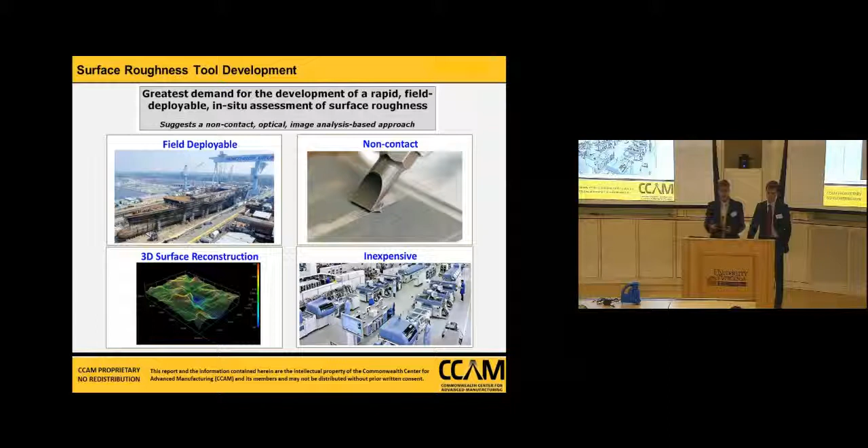It should be non-contact so that it doesn't affect the surface that it's inspecting. In addition, it should be inexpensive so that it can be proliferated and put throughout the entire environment. And it should also be able to reconstruct an entire 3D surface so that a height map can be used to calculate all the desired surface roughness values.

When our group went out, we kind of found that there existed two categories of existing profilometry tools, one of which were mechanical profilometers, which are relatively inexpensive and operate by dragging a stylus along a sample surface and measuring physical displacement. Although they're relatively inexpensive, they do have sample contact, which is an unfortunate consequence. There also exist non-contact setups that are mostly very expensive and laboratory-based, and are prohibitively expensive to be able to bring out into the field.

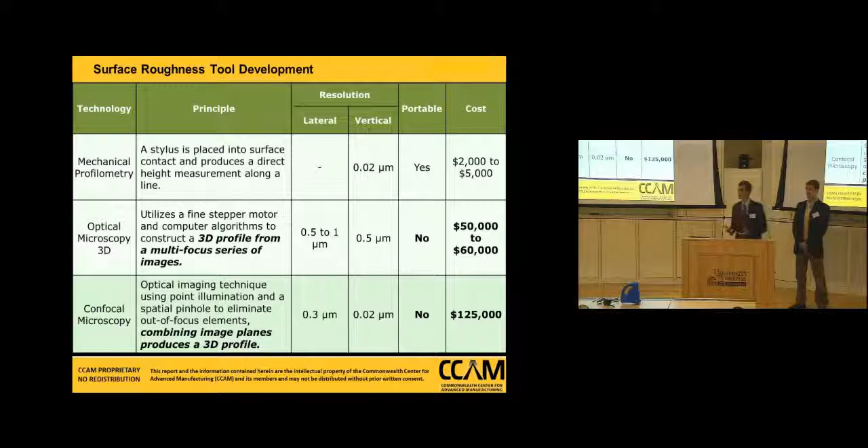Right, so as Robert touched on, ideally we would have a combination of these two tools. You would have the 3D image reconstruction capabilities of the confocal microscope or the optical microscope, but with the lower price tag of the mechanical profilometer. And what we found in looking in industry is that such a tool didn't really exist. So we set our own task of actually developing this tool.

And the result of this work was the first generation portable optical profilometer. It's small enough to be handheld. It's the blue trinket up in the front. It has a fairly low image acquisition time, 10 to 15 seconds, and it has the capability of calculating roughness statistics on the 1.6 to 12 micron range. Also critically, you can see that the cost is very low. It's below $7,000, which is much, much less than competitive 3D profilometers.

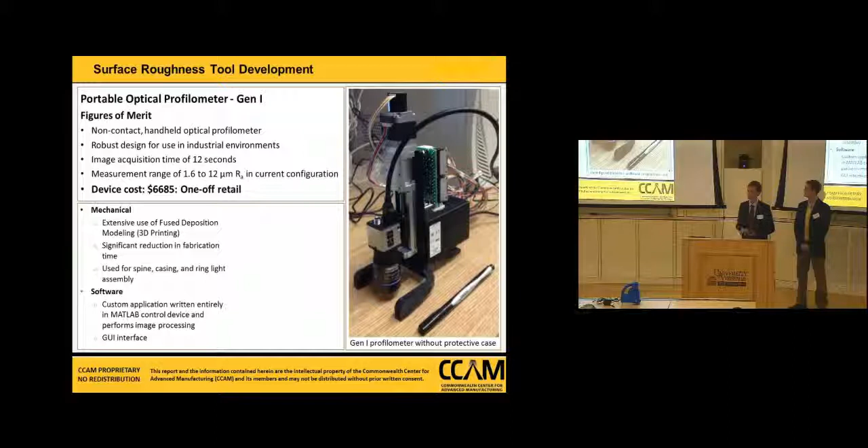So what you can see here is the principle upon which this device operates. So what you do is you have an imaging assembly that takes a series of images of the same area, but at different heights, so in the Z dimension. So you can see the images across the top are of the same area, but different portions of those images are in focus corresponding to different heights in that map.

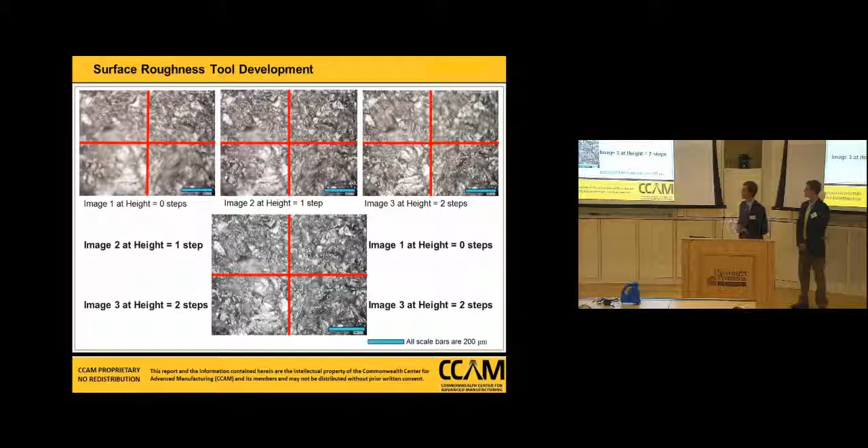And based on the knowledge of an X coordinate, a Y coordinate, and a Z coordinate, based on what image in the stack a particular portion of the image is in focus, you can stitch together a composite image that's completely in focus because it takes different portions of the composite images. Also with this information, you can create a 3D reconstruction of the surface from which you can deduce roughness statistics.

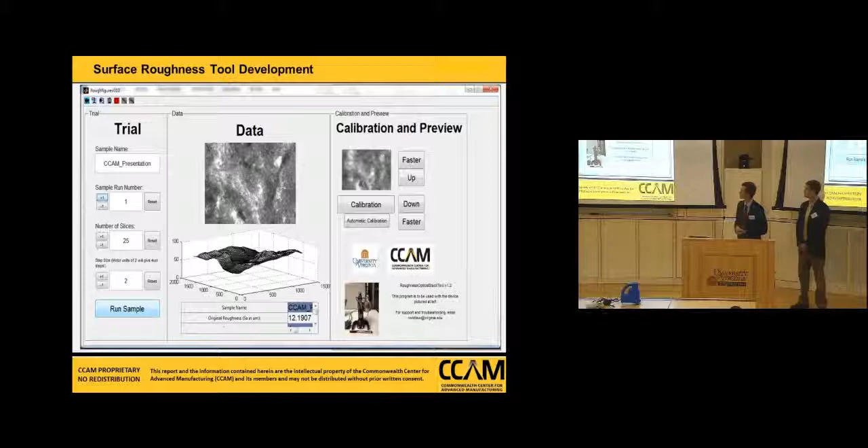So here we have the user interface. It's very intuitive, and you can easily track different samples or batches throughout a manufacturing process. Also, you can see the reconstructed image and height map in the middle there. So we were happy with the results of the first generation, but we pressed ahead and made a third generation.

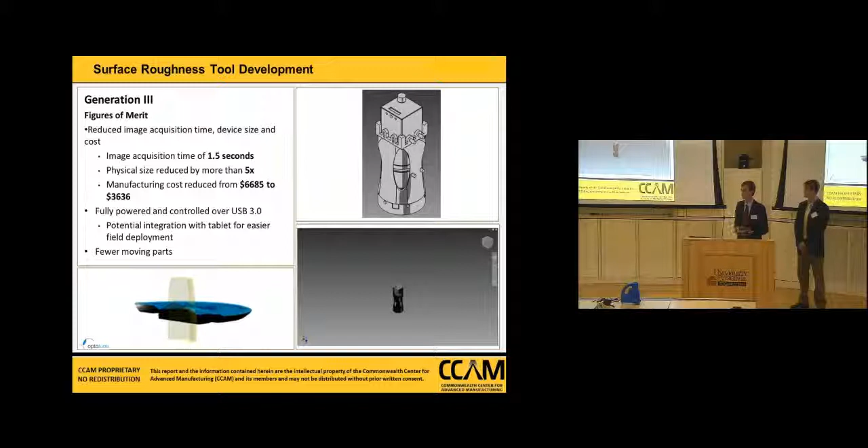So instead of using a traditional mechanical linear actuator to step through those varying planes of focus, we're using a liquid lens, which you can see an animation of in the bottom left corner there. And what that does is with a piezoelectric actuator, you can deform a membrane, which changes the optical characteristics so that you can get, again, a stack of images, but in a much smaller and faster package. It's about 10 times faster and actually $3,000 less expensive because the control hardware is not quite as expensive.

So in conclusion, the tools which we've developed are good alternatives to products which are currently available for purchase. They've been extensively benchmarked against NIST standards, and because of the versatility of the optics, you can switch them out and use them on a variety of different materials.

So going forward, we are going to do more extensive testing of the liquid lens generation. We're considering classifying cleanliness with the images that we're gathering. And finally, we're partnering with the funding organization, CCAM, and pursuing commercialization of these devices.